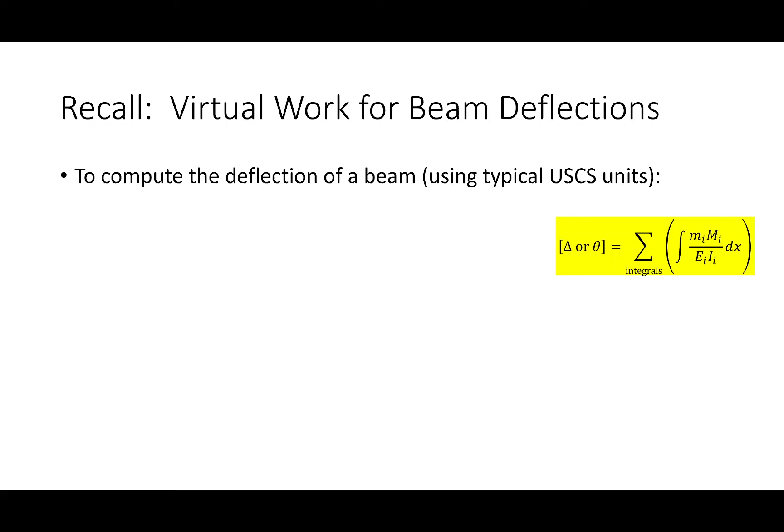Let me pull the slideshow up—this is really important for our discussion. First, when computing deflection, this is where we left off last time: we're going to use the following expression. Again, this is akin to what we were doing for trusses. We were summing up energy terms—with trusses we summed up terms, whereas with beams and frames we're summing up integrals. The reason we could sum terms for trusses is because we can treat the axial forces as constant along the length of the member.

We can't do that for moments in beams and frames, so we have to integrate. We still have to do a real analysis and a virtual analysis. Instead of getting a suite of real and virtual values, we're going to get a suite of real and virtual functions. These big M and little m functions are equations that, if graphed, would be the moment diagram. So that's basically what these big M and little m functions are—they are graphs to plot the moment diagram.

If we're talking about the shear diagram, we would have big V's and little v's, but right now we're just looking at the moment diagram. The big M functions are generated from the real structure. The little m functions are generated from the virtual structure: kick all the loads off the structure, place a single unit load at the point of interest with a magnitude of 1 in the direction of the assumed displacement.

We still have our E values. For I values, we were using areas for trusses—now we'll use I's for moment of inertia. For most practical purposes, it's the same thing since it's just a numerical section property, so we can treat it the same way. We do have to account for our unit conversion factors, so for rotations, this is what we left our class with last time.

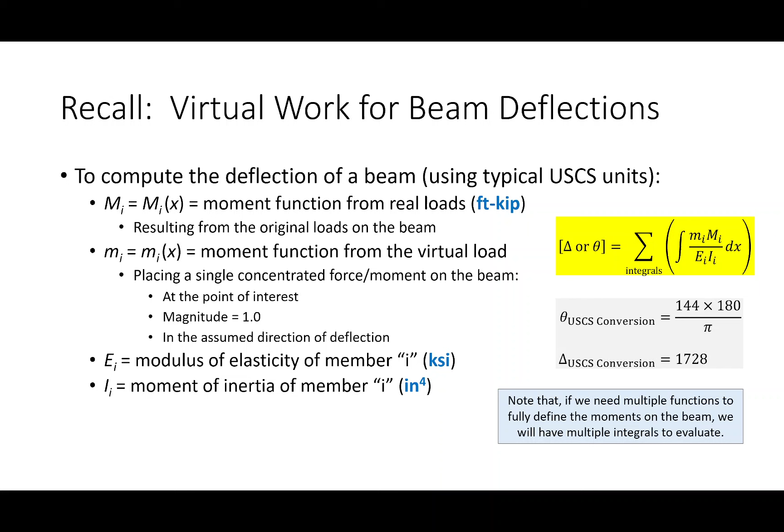What we're going to have to deal with, and what's going to be the central challenge of beam deflections, is this. Let's say, for example, I have this beam. I have to believe everybody here could construct the shear and moment diagram for this beam, computing the reactions and drawing the shear and moment diagrams.

The question I want you to ask is how many moment functions, how many m of x functions, are necessary to fully construct the moment diagram. Not from a math perspective of how many equations, but how many functions of x do we need in order to fully construct the moment diagram?

There's a really easy way of figuring that out: imagine a big section cut moving along the beam. Keep it simple, and whenever you see something different, that necessitates the need for another function.

To give an example, imagine this is my section cut. Remember, when you cut a section, you can look either to the left or to the right. So let's cut a section and look to the left, and start moving this section cut over. If I cut a section and look to the left, what do I see?

I see a triangular load, triangular load, triangular load, triangular load. Now I see something different: a reaction at B and a distributed load. So I keep going, keep going. Is there anything different between here and here? It's still a triangular load, distributed load, reaction. Over here, triangular load, distributed load, reaction.

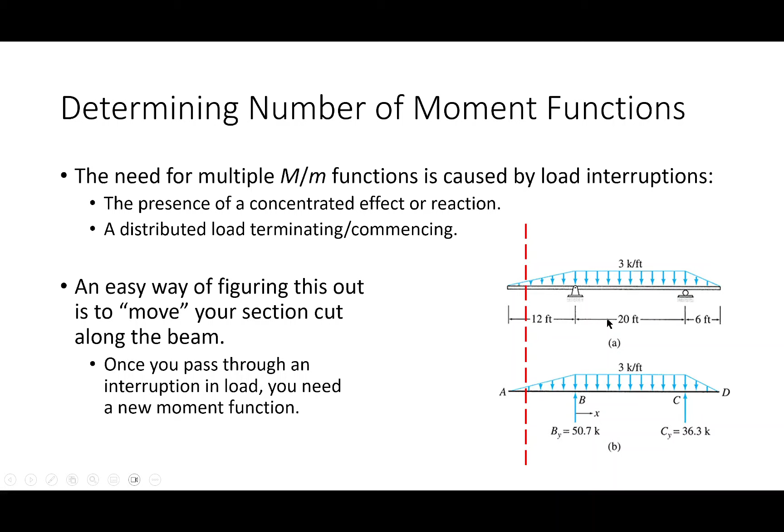Now, I want to look at the virtual loads. Let's take a step back. We're going to be doing at a minimum 2 analyses. We're going to be doing a real analysis, and we're going to be doing a virtual analysis. Right? Okay, let's think about this.

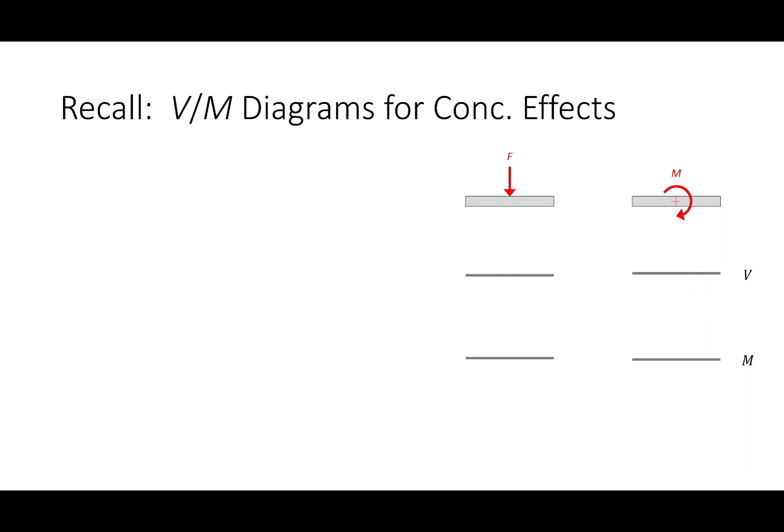The virtual analysis is kicking all the loads off the structure and replacing it with one load. And the one load is either going to be a concentrated force or a concentrated moment, right? So let's take a look at what the shear and moment diagrams look like.

Here's what the shear and moment diagram looks like for a concentrated load. We have constant shear, linear moment, right? And then for a concentrated moment, we have constant shear, constant moment. The moment doesn't affect the shear diagram, and for the moment diagram, it would just be this.

So the real point I want to make is, does anybody see any pattern with these moment diagrams? If I have a structure that has nothing on it but either this or this, does anybody notice something about the moment diagrams? The answer should be, they're all linear. They're all lines, right? Okay, are you with me on that?

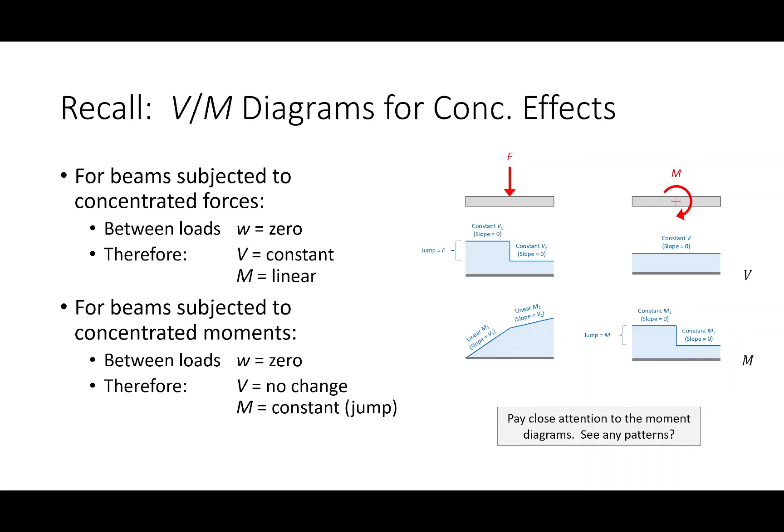So here's what I'm getting at: if we're talking about virtual functions, because the structure is only subjected to one concentrated effect, they're always going to be lines, okay?

And the value there is that you can always find the equation of a line a lot easier maybe than cutting a section. Remember, we can always cut a section to determine a moment, right? Well, we could also just plot the moment diagram and just look at our values. We could cut the section, but that could be tedious. Here's something else that we could use.

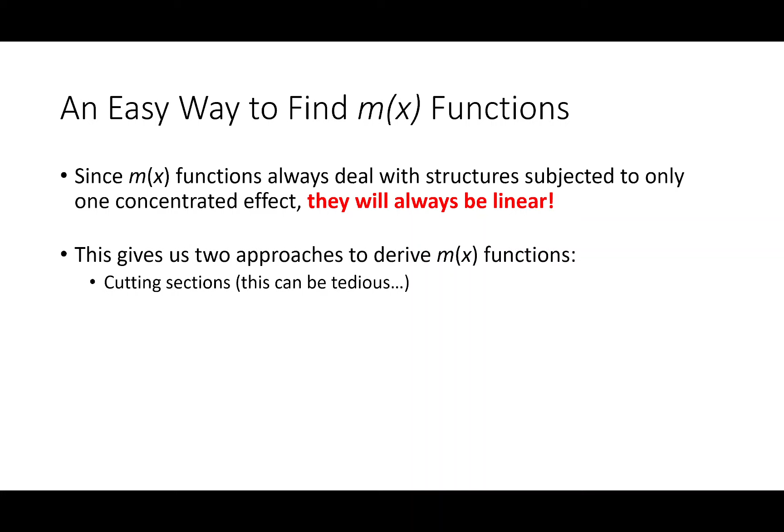That's just basic geometry. For example, how do we find the slope of a line? The change in y over the change in x. But do we even need to worry about finding the slope of a moment diagram? Because isn't the slope of the moment diagram just the shear, right? And then we could say y minus y1 equals m times x minus x1, using point slope formula just to find the equation of a line. Isn't that a lot faster than cutting sections?

So for your virtual functions, it might be a lot faster to find the functions this way than cutting a bunch of sections. I'm throwing this out there because I'm trying to make your life easier and faster when doing these problems. Homework 6.2 is going to be kind of tedious, and I'm throwing this stuff out at you to make your life easier when you do that assignment.

So far, so good? I'll demonstrate what I mean here in a bit. And by the way, I should mention that if you ever have a linear real moment diagram, this would work too, that you could just use point slope formula to figure out your function. Don't worry, I'll show you how that works in some examples.

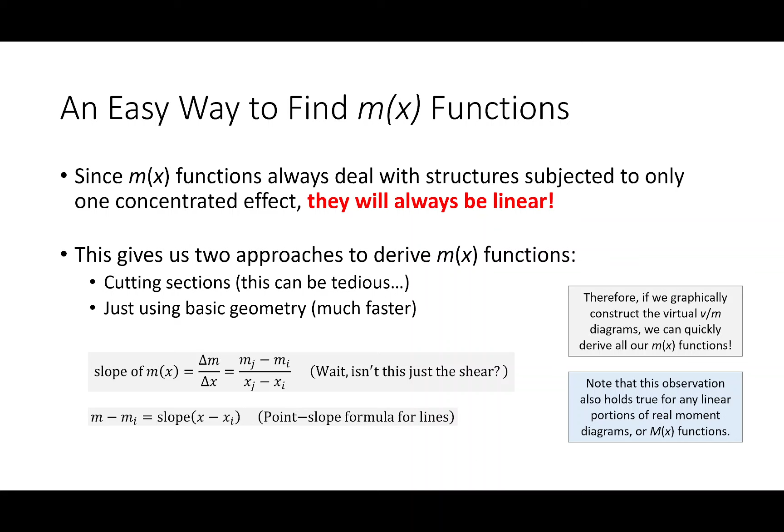Everybody good? Okay, this is going to be our problem for today. Let me go to the notebook here. All right, so, oh, that's the wrong one. We're on example 1.

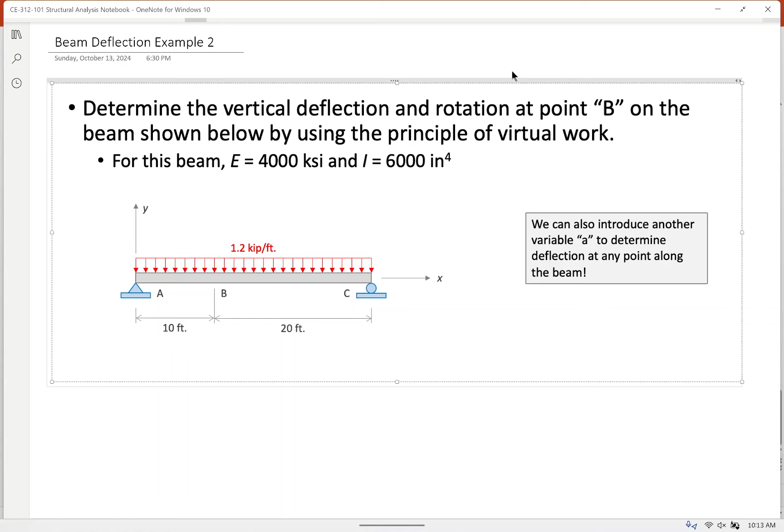Okay, so here's our problem, and I want to find the vertical displacement and the rotation at point A. I want to see what is going on with this point here in terms of displacement and rotation, okay? So the idea, just to put a little picture up here, here's the beam, backwards.

If the beam is subjected to some load, imagine you were holding a flexible ruler in your hand and you just applied some force over it. I propose that the ruler, or the beam in this case, is going to deflect something like that. So not only are we going to get some displacement, but we are also going to get an angle change. So it's not only displacing, but that point is rotating. So we're going to get an angle change, and we're going to get a displacement.

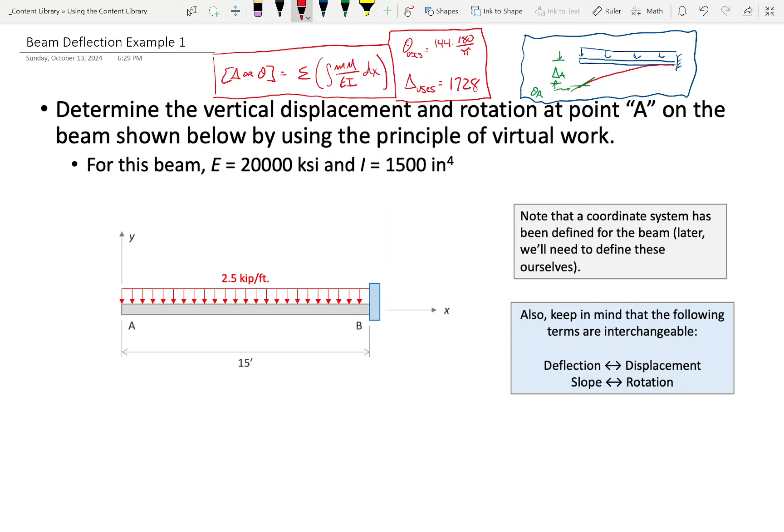Everybody get a general idea of what we're doing here? All right, so the first thing we're going to do is look at the real moment functions. Keep in mind our goal is to look at these integrals.

Let me go back to our section cut example. How many functions are we going to need to fully define the moment diagram for this beam? One, right? What does the moment diagram look like for this beam? We don't need the values to sort of get the idea.

The shear diagram is going to go down, and then there's going to be a reaction that brings it back up. And then the moment diagram is going to do like that, and then there's going to be a reaction that brings it back up. So we're going to have some moment diagram, which is a parabola. We only need one equation to fully define the moment diagram.

So what I'm going to do is this: I'm going to cut a section. And which direction do you think I should look? To the left or to the right? Left, right? There's less going on.

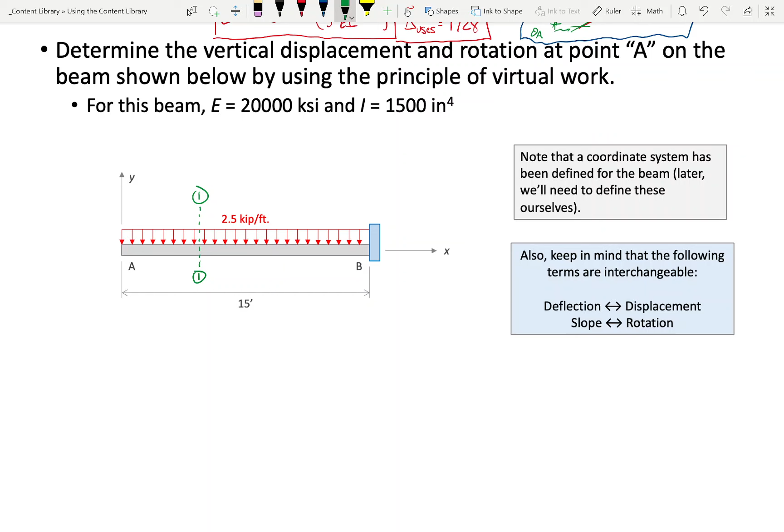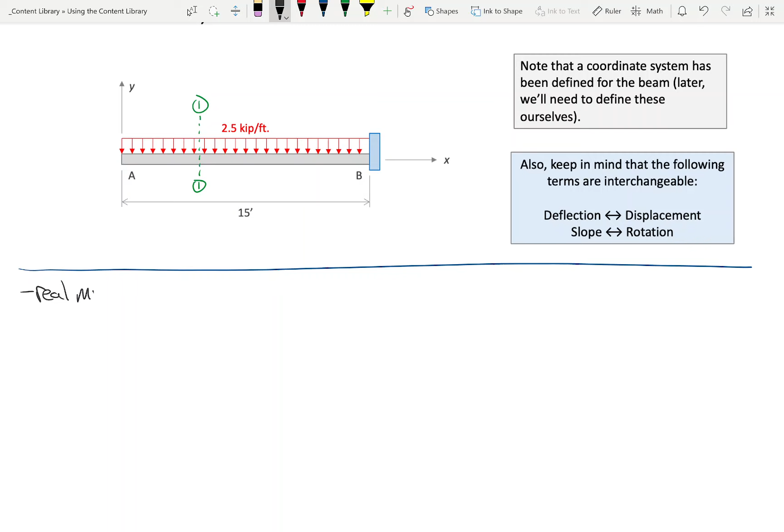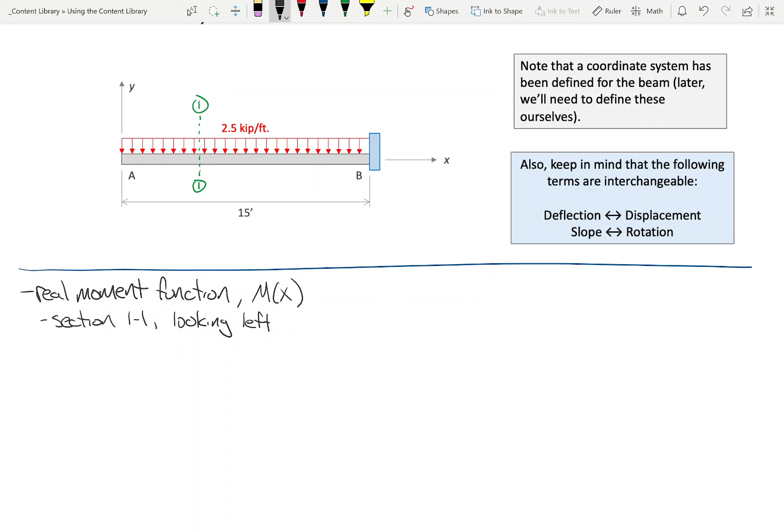So what we're going to do is say, okay, real moment function. I'm going to cut a section and look left. All right, so what does that look like?

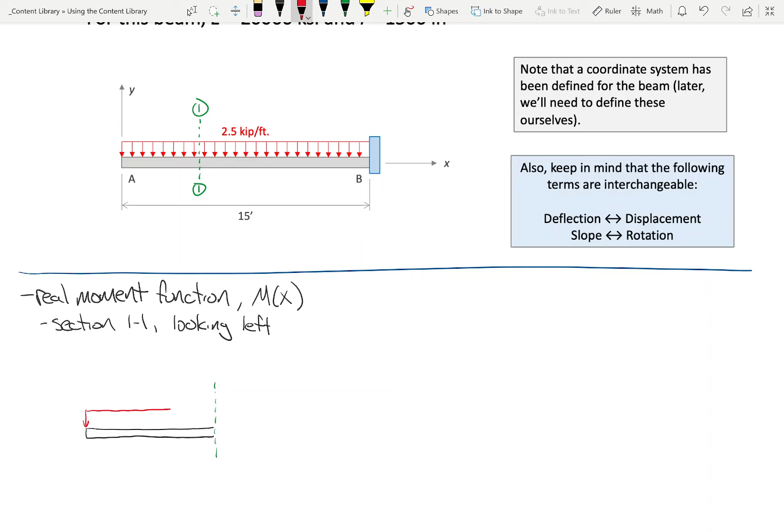So let's see, I've got this beam cut right here. I've got a load right here. This is 2.5 kips per foot. We're cutting a section because we're trying to derive a function, an equation as a function of x. So the distance from the left support is going to be some distance x.

Tell me what to do. How do I collapse this distributed load? What's the point load going to collapse to? That's how far away it is from the section cut. How much is it? 2.5x.

What we're interested in, we have our shear and we have our moment. What we're really interested in this case is the moment. We don't really care about the shear function because we're defining our deflection as this. By the way, near the end of our talk on this, we are going to take a look at what would happen if you consider shear. That's a later discussion, we'll get to that here in a bit.

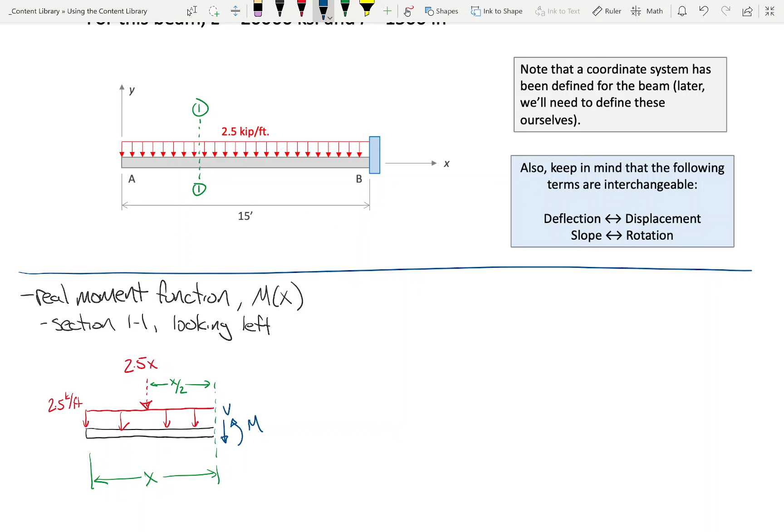All right, so I'm going to cut a section, I'm going to sum moments at the section cut. I already cut the section. Okay, so tell me what to write. How do I account for this? What do I do?

Does it go on left or right? 2.5x times x over 2 is going on the right side. There you go. 2.5x times x over 2.

And then, is there anything else I need to put in this table? M, and that goes on the right.

Okay, so 2.5x times x over 2 is 1.25x squared, right? Okay, let me show you how I'm going to write this. I want to get into this habit. So therefore, what I'm going to say is that m equals minus 1.25x squared, okay?

But what I'm going to do is, the beam is how long? 15 feet long? Yeah. Okay? So what I'm going to do is I'm going to say that this is from 0 to 15, okay?

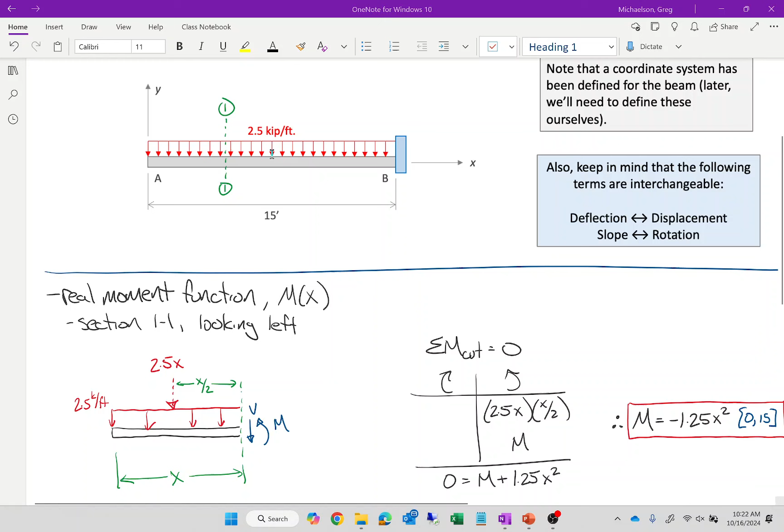All right, so how long is the beam? 15 feet. 1.25? Is that what we said?

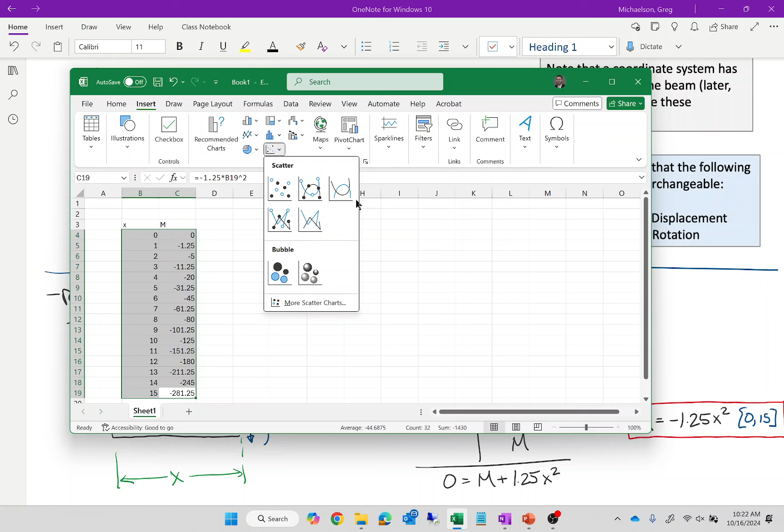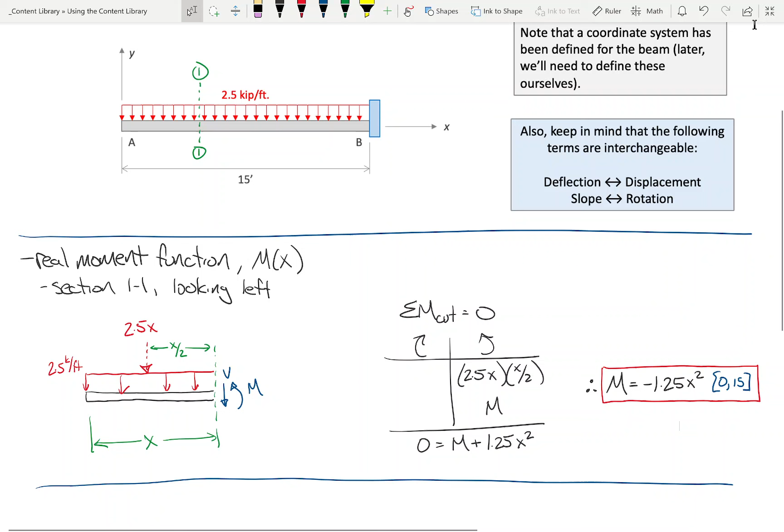Does that look right? That looks right, doesn't it? So we have a simple way of just checking whether or not the function that we've derived makes sense. That is always going to be advantageous, or that's always going to be available to you.

Okay, so let's write this down here. So we have m of x. Sometimes I skip the of x and I just write m, but if you want me to write that, I will. It is negative 1.25x squared, valid from 0 to 15.

Now this valid from 0 to 15 is not really going to matter for this problem, but it will matter for later problems because we'll have multiple functions. So I want to get in the habit of sort of describing that. Okay, so far so good?

Okay, so now let's do a virtual moment function. This problem is asking for two deflections, or two things we have to evaluate. We have to evaluate the displacement at A, we have to evaluate the rotation at A, okay?

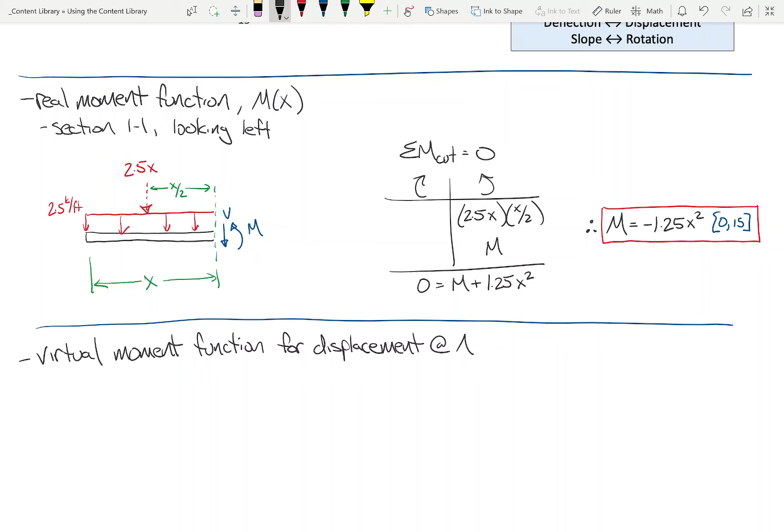So what I'm going to do is I'm going to say virtual moment function for displacement at A. Okay? All right, so let's see how we would do that.

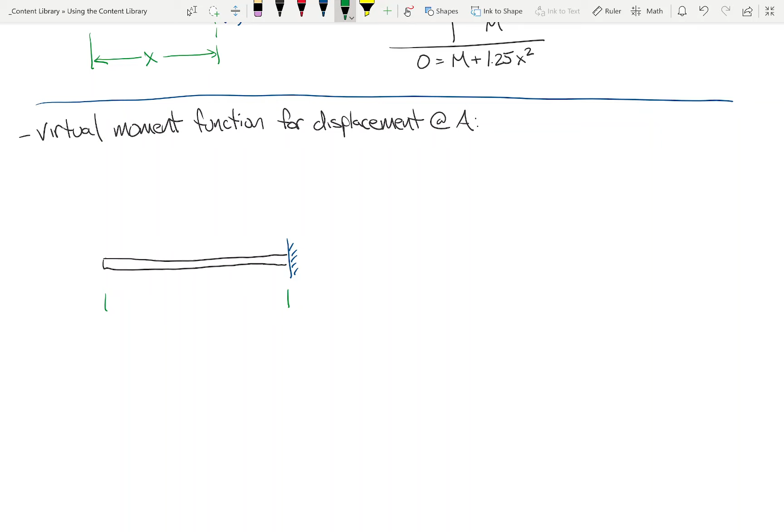Okay, so how did we do virtual analyses for trusses? We take the structure. Okay, let's see, here's the structure. This is the structure, that's point A. We kick all of the original loads off the structure. Get all the loads off the structure. Kick them off. And we replace them with a single unit load at A.

Now, for the original structure, do we all agree that a reasonable assumption would be that point A deflects downward? So here's what I'm going to do. I'm going to place a single unit load right there. Okay?

With me so far? Now, let's just sort of conceptualize this. What do we think the shear diagram and the moment diagrams look like? Let's do V and M. So we're going to have down, over, up, right? So the shear diagram is going to be down, over, up, like that's what it's going to look like.

So what's the moment diagram going to look like? It's going to go down, up, right? Everybody good on that? Okay, so we'll see if that's right.

Okay, so what I'm going to do, cut a section, look left. I'm going to look the same way I looked before. So we'll say little v, little m, at x.

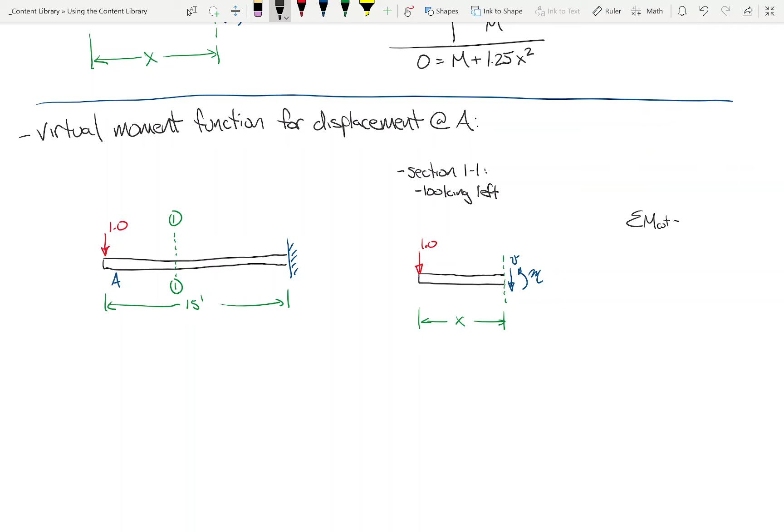Okay, tell me what to write. How do we handle this? What's the moment at the cut from that? 1 times x. 1 times x, which side, left or right? Right, right, so we have 1 times x.

And a lot of times I will write my 1 as 1.0 just so it's sort of like not mistaken as L or I or something like that. So that's just me trying to make sure that you all can read my handwriting.

Then we have the m, right? And the m goes like that, right? So 0 equals m plus x, right? Everybody with me on that?

So would you agree that m is going to equal minus x? And that's also going to be valid from 0 to 15, right? So,

Okay, what I might do for the purposes of notation is I might call that m delta because I'm going to have another little m function for rotation. So that's just me sort of differentiating what I'm about to show you here in a second.

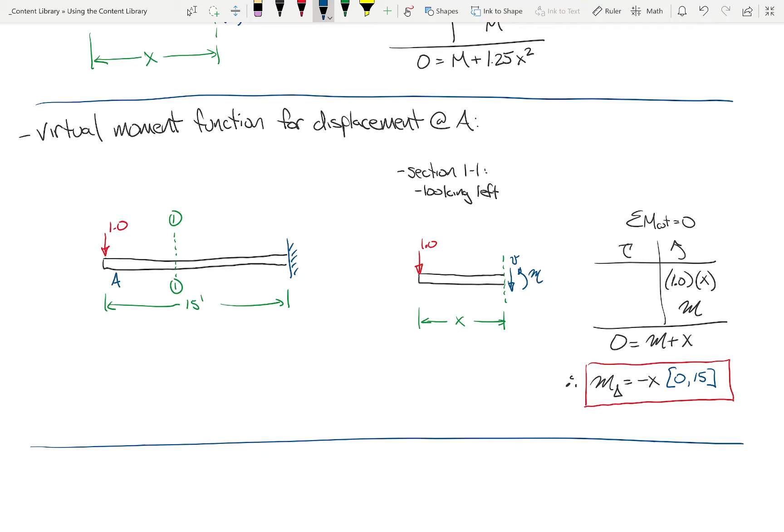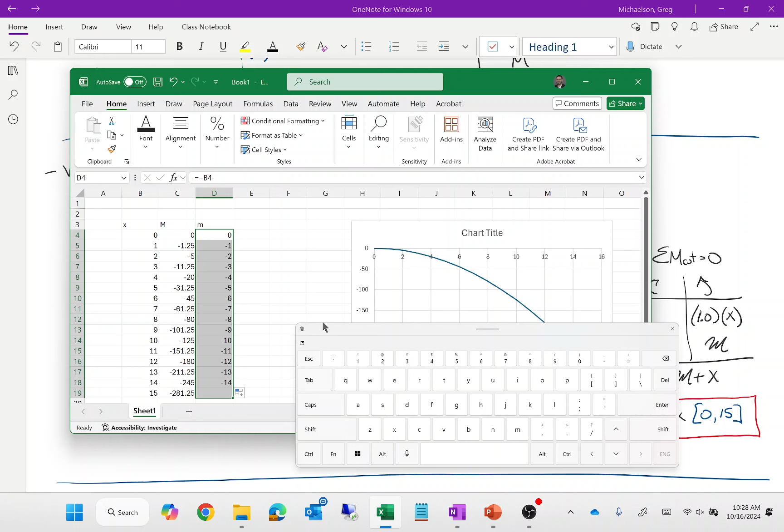Okay, and again, can we validate this? Well, absolutely. You know, just go here and say do that, and then does that look right? Looks right to me. So that one's a pretty simple one to just sort of know that it looks right.

But later on, some of these functions may not look so simple, and so being able to graph them is pretty important. Okay, so we'll write little m, and I'll just put m delta is minus x. Also valid from 0 to 15.

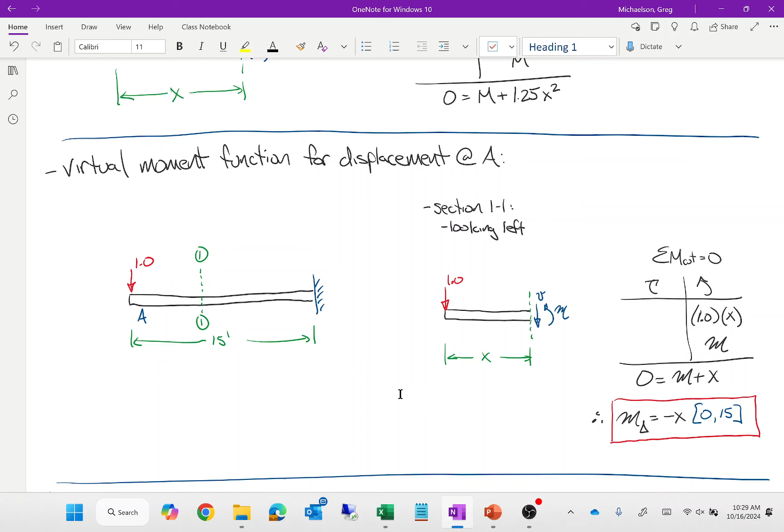So far, so good? So now let's do the method of virtual work, okay? We'll evaluate this deflection, then we'll come back and do rotation.

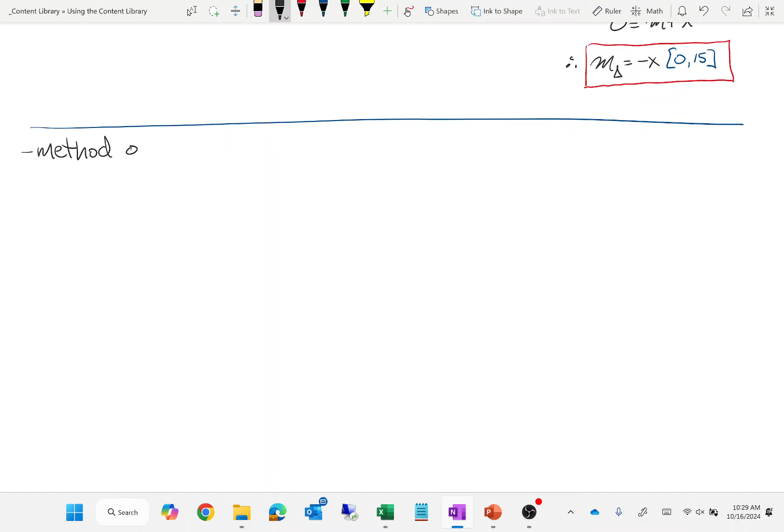So what we're doing here is we're saying that the deflection is the sum of the little m over EI dx integrals. That's what we're doing.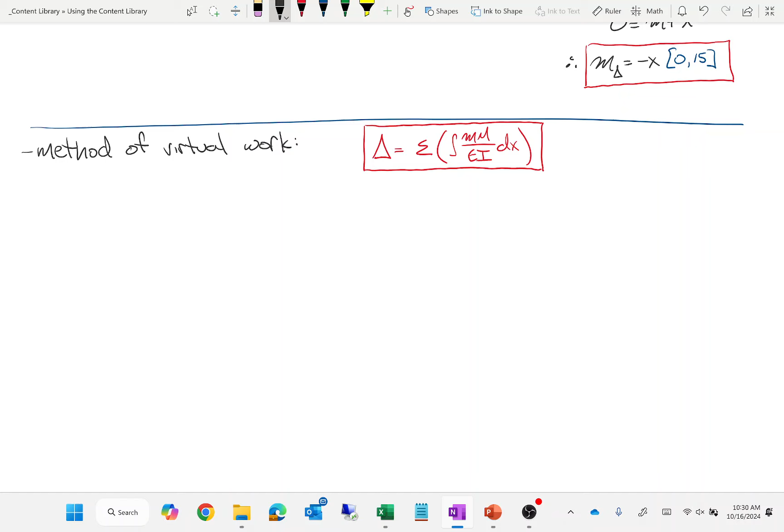But we only have one integral to evaluate. Again, this problem, we're only going to have single moment functions. This homework, only single moment functions, but later on we might have multiple ones. All right, so let's sort of write down all these terms.

So we have an m of minus x and m of minus 1.25 x squared. By the way, if we want to throw some units on this, so this would be foot kips, okay? And for those of you wanting to be hyper specific about your units, the units for this is actually feet, because you're taking a moment, which is a force times a distance. The force is unitless, so it's a unitless force times a distance. That's why it's feet.

Okay, E. What was E in the beginning of the problem? What was it given as? 20,000, and that was in KSI. And we were given a moment of inertia of 1,500. And if you recall, moments of inertia are in inches to the fourth, so it's like an area times a distance squared. That's why it's inches to the fourth.

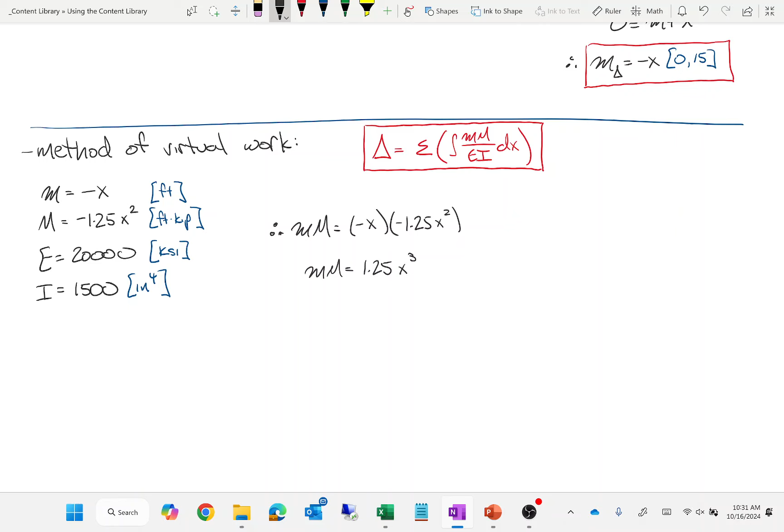Okay, so what I'm going to do is a little bit of algebra off to the side. So the first thing I'll do is little m times big M. So that's going to be minus x times minus 1.25 x squared, and so little m big M is 1.25 x to the third, right? And maybe what we'll do is also formalize that and say that that is valid from 0 to 15.

Okay, so therefore the integral is actually pretty easy. So if I want to find the deflection at A, remember, the deflection is just summing up all of that internal energy. So what I'm going to do is, this is how I'm going to do this. I'm going to integrate from our little m big M over EI.

Or here, let me get formal. Let's move that over here and say we're summing these up. So here's how I'm going to do this. We're going to integrate from x equals 0 to x equals 15, of the following.

So what is little m big M? Little m big M is 1.25 x to the third, right? And then EI, E is 20,000, 1,500, dx, okay?

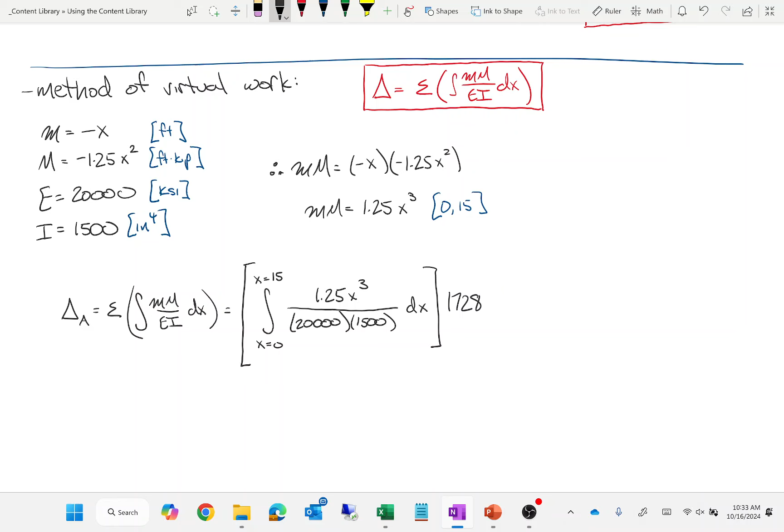Now, did I forget something? For the astute observers, the unit conversion. What I will do is take this entire integral and multiply it by 1728. The reason we're multiplying it by 1728 is because KSI in inches to the fourth for our denominator terms, but our numerator terms are in feet. And so we've got to resolve that. We end up having 3 feet terms that need to get converted to inches.

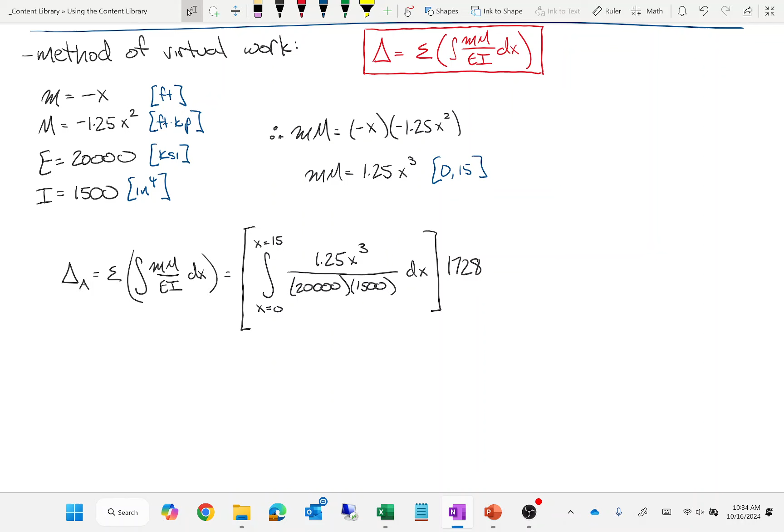Now here's the thing about this integral. I know it's 10 o'clock in the morning and you're thinking calculus, it's too early. But I really want you to take a look at this integral because it's really not hard. First off, I seem to remember this rule in calculus that says that I can factor out constants.

Right? And then what am I left with? An integral from 0 to 15 of that. I mean, isn't that pretty easy?

Now, here's the thing. Let's talk about this. I want to be clear that this is not a calculus class, okay? So you all need to be able to perform integrals, but when I say the integrals are simple, I mean it, okay? This is about the most challenging integral that we will do in here. It's integrals of polynomials, okay? So first off, I'm just going to tell you that the answer to this integral is

12,656.25. Okay? Now, just to be clear, if we want, we could say that the integral from 0 to 15 of x to the third dx is x to the fourth over 4, evaluated from 0 to 15. So factor out the 1/4, 15 to the 4 minus 0 to the 4, which is 15 to the fourth over 4. Okay, and plug and chug, that's what you're going to get.

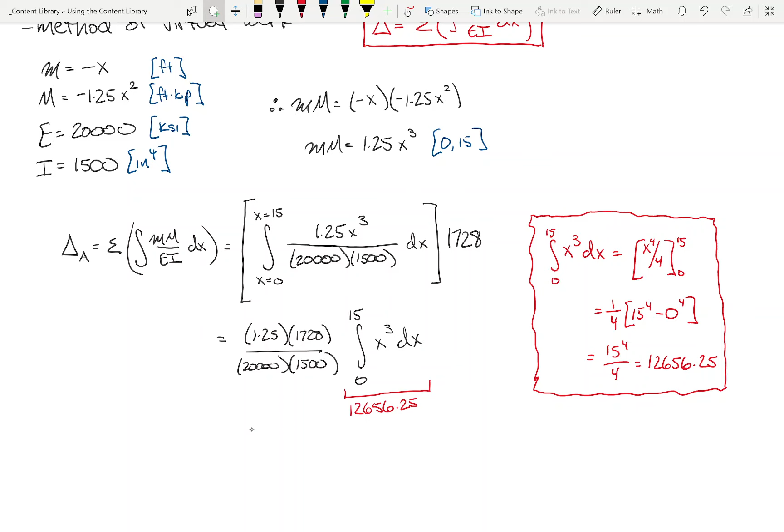Sound good? So the deflection would then be 1.25, 1728, 12,656.25 over 20,000 times 1,500. And when you evaluate that, what do you get?

And typically, I tend to ask that deflections get reported to 3 decimal places. That's sort of a standard in most software packages. Like most software packages will do 2 to 3 decimal places, no more. 0.911. Now, so it's 0.911, but positive 0.911. Okay. Do I have a second on that?

So what does that mean? I propose that the deflection at A is 0.911. What are the units for that displacement? Inches. Like when we developed our conversion factor, we developed it to achieve a target unit system of inches. And that's the magnitude. The direction is downward because we got a positive answer because that was our assumption. Okay?

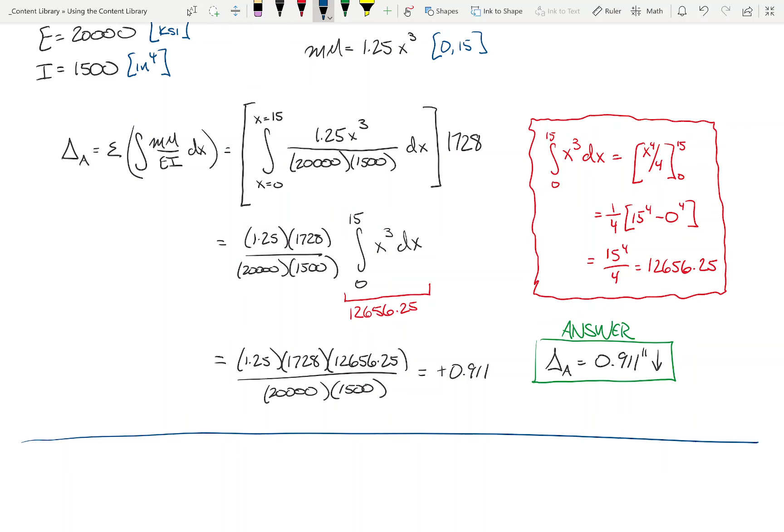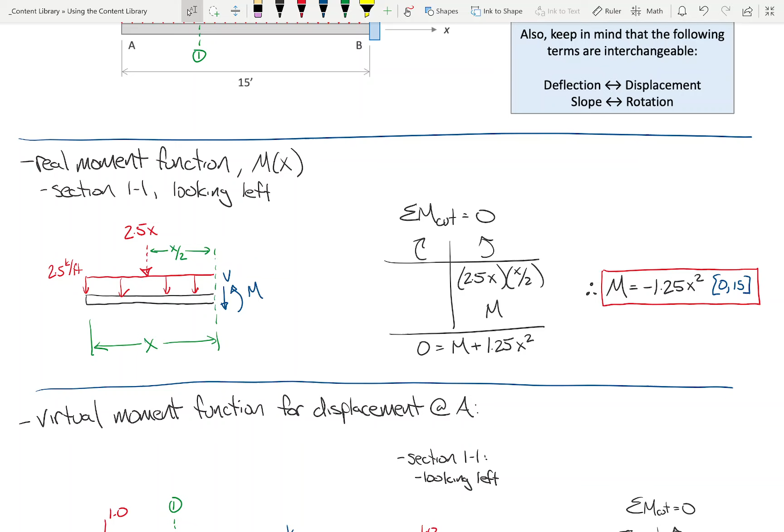So, the next thing to do, if we want to close this out, is the problem asked us to compute both the displacement and the rotation. Okay? So let's talk about how we would do rotation. If we sort of scroll through the problem, we said, okay, we have a real moment function, and then we had a virtual moment function for a displacement at A. Really now what we're going to need is we're going to need a virtual moment function for the rotation at A. Okay, we're going to need that. So we're going to do another virtual analysis.

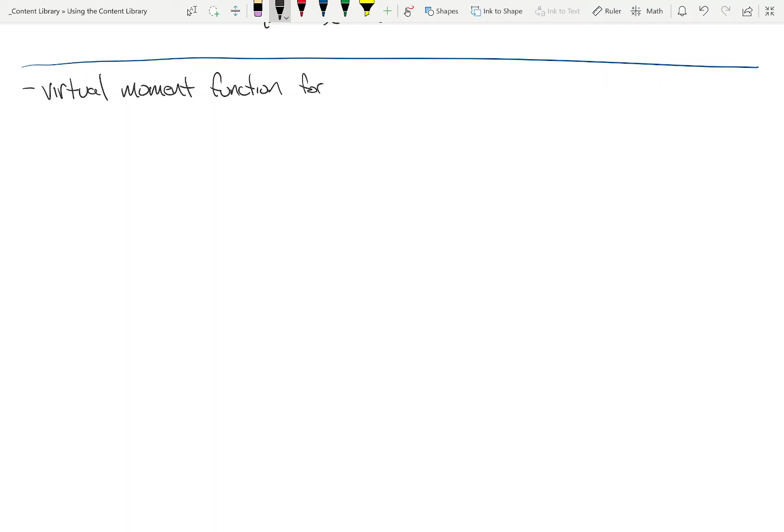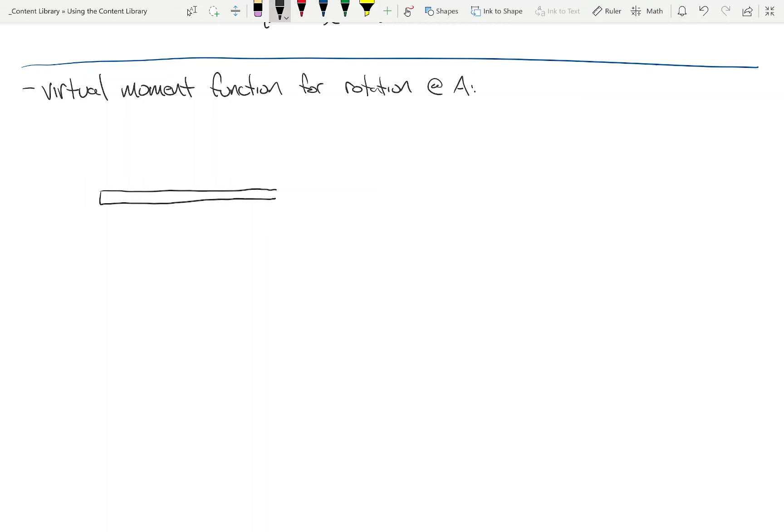Okay. So let's see if we can develop a virtual structure in that regard. So here's our beam. This is point A. And remind me, let's see.

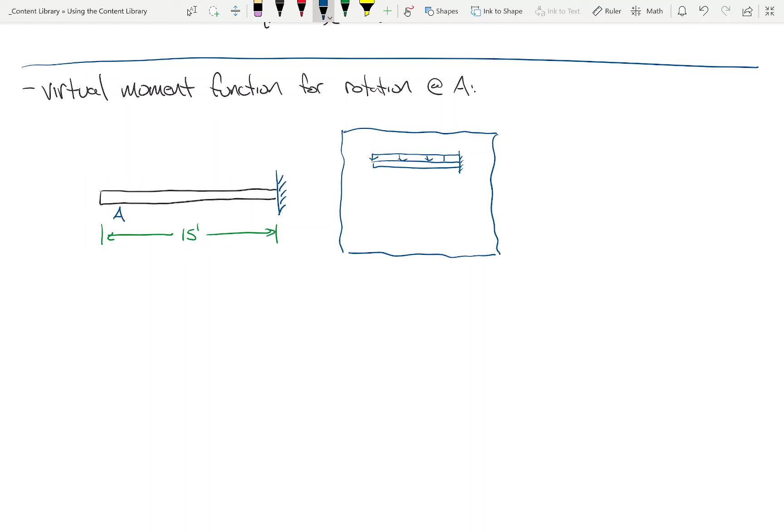We said that the beam is going to deflect, I don't know, something like that. So what you're telling me is that it used to look like this, and now it looks like that if we're looking right there. So the rotation goes like that. So maybe what I ought to do, place a unit moment like that. And by the way, if you're getting worked up over whether or not it needs to rotate this way or this way, it doesn't matter, just guess one, okay? And if you get a negative answer, it's just going the other way. That's all that means. Make sense?

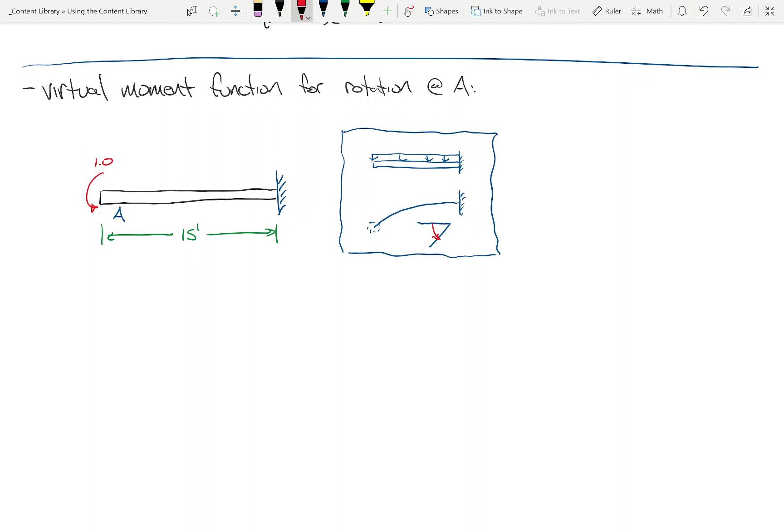Okay. So, same thing as before, right?

What I will say ends up becoming an issue, not for this problem but later, is ensuring that the moment functions all respect the same coordinate system. So for now, if you look left for a real moment function, it's probably a good idea to look left for a virtual moment function too. Look the same way. You don't have to, and you'll get the same answer, but the algebra tends to get pretty messy. You'll see what I mean.

So there's our function, or there's our section cut, right? Just looking at this part over here. So if I sum moments at the cut...

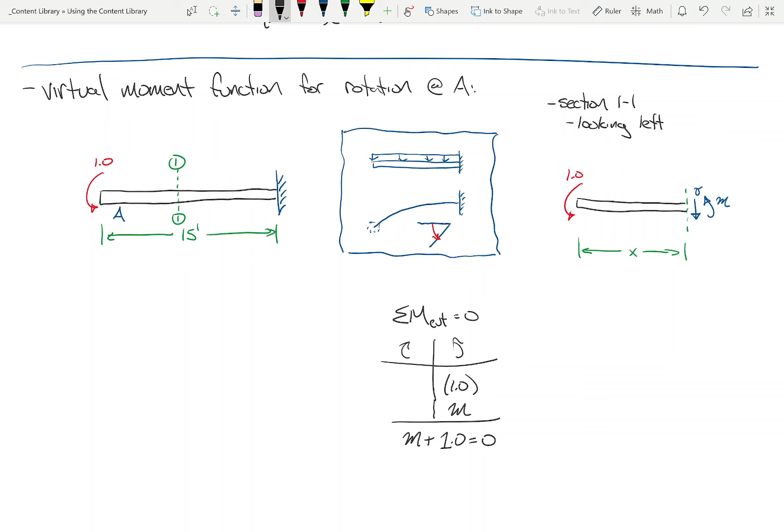So therefore, our m theta is going to be -1, valid from 0 to 15. Typically, if you have this and this, usually you're going down in order, right? So this is an x term, this is a constant term, typically. Not always, but typically.

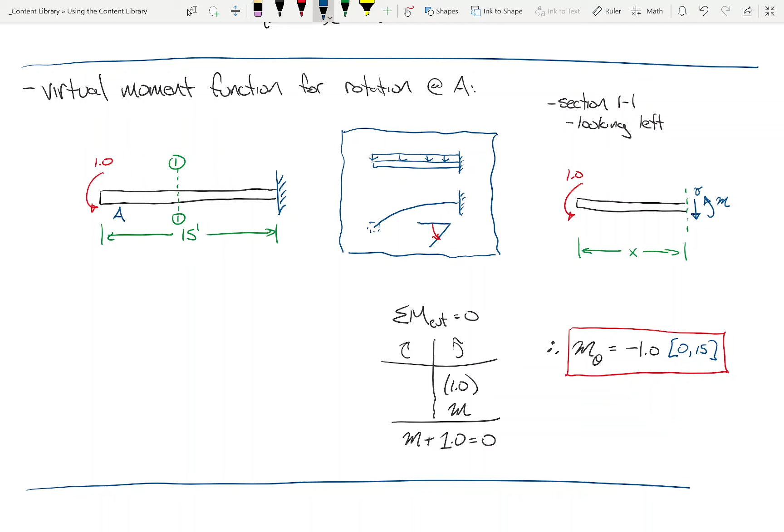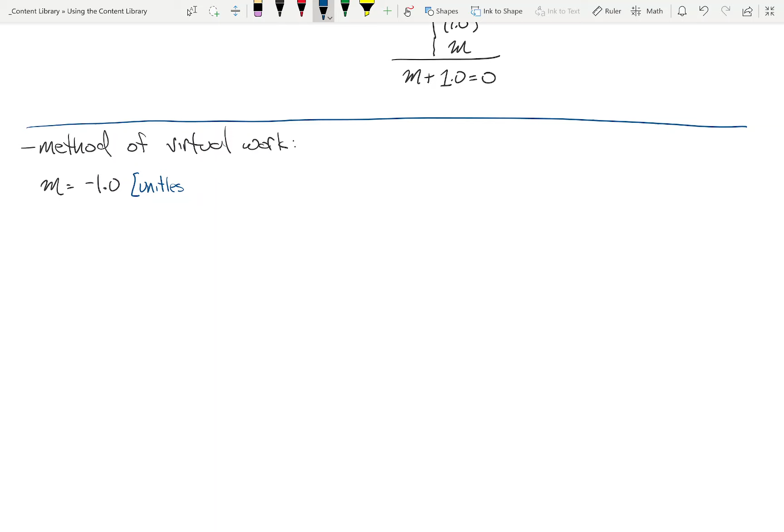Everybody good? So the method of virtual work then is pretty easy, right? So this is -1, and the units for this are actually unitless. We still have our same real moment function, that doesn't change. We have our E value, 29,000, not 29. Here, I'll do the same notation.

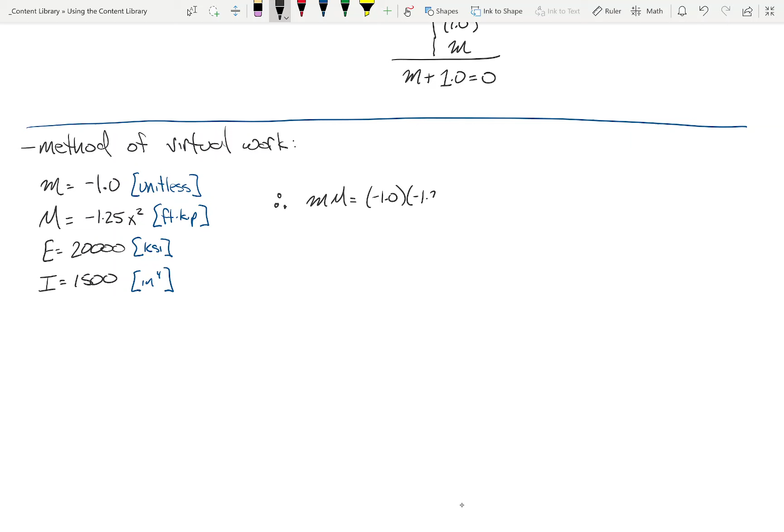So a couple things that we can do, just like last time. Let's do this algebra first. We'll do 1.25x - why did I say x cubed, it's x squared. I think I'm getting ahead of myself. Okay, so now we can compute our rotation, right? We're still going to use the same idea, we're still going to sum integrals.

But we're only going to have one integral, okay? And it's going to be an integral from x equals 0 to x equals 15 of a big old fraction. The EI on the bottom. On the top, we have that. And then what's our unit conversion going to be here? Times 144, 180 over pi.

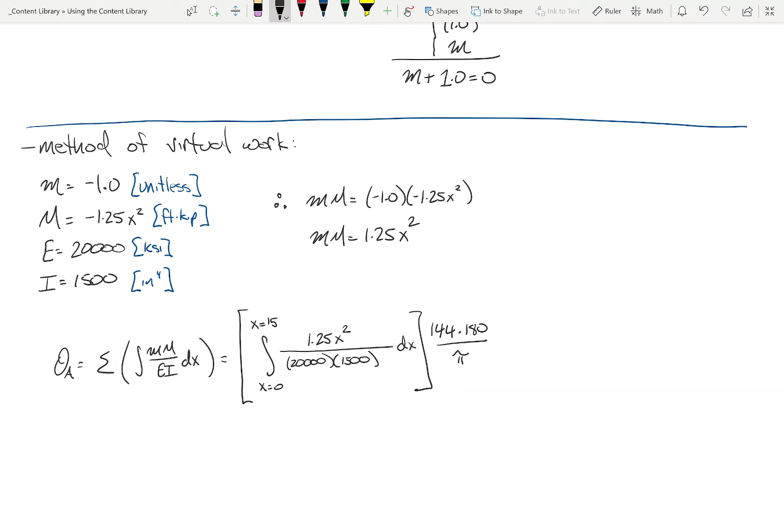And again, this is pretty easy, right? Because everything that's a constant just gets factored out. So if I factor everything out that's a constant, I'll stick that all over here on the left. So I've got one big old fraction: 1.25, 144, 180, 20,000, 1,500, and pi. And what am I left with? I'm left with an integral from 0 to 15 of x squared dx. That's pretty easy, isn't it? So are you okay if I just tell you the answer to that is 1125?

And what do we get here? We'll say also maybe 3 decimal places. Positive, by the way.

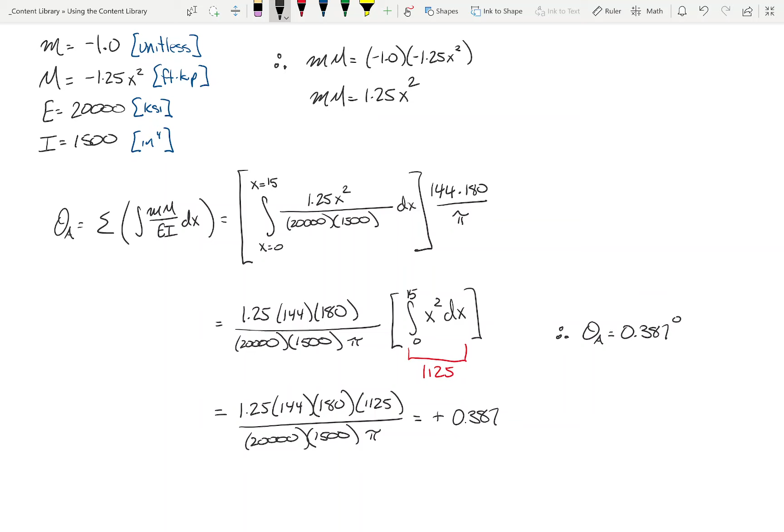Anybody got an answer? 0.387? Yes, okay. So therefore, the rotation at A equals, let's say, 0.387. What are the units for that 0.387? Degrees. And in which direction? Well, which direction was our concentrated moment? What is that, counterclockwise? Counterclockwise.

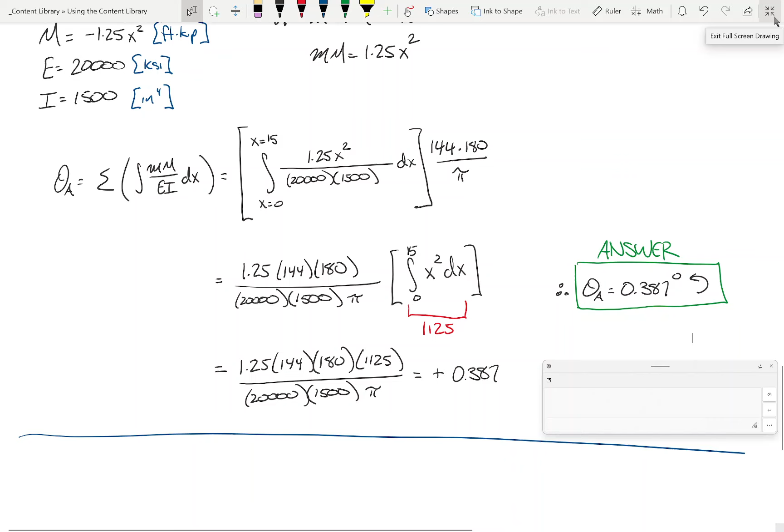Not too bad, right? So I will let you know that for your assignment due Friday, I made it a little on the challenging side. I should go ahead and let you know. So here's what I did. For your homework assignment, I made it a triangular load. And what I am asking you to do for this problem is work a little backwards - I'm asking you, what does the I value need to be, what does the moment of inertia need to be such that the deflection is a certain value? Which is very much a design problem, right? Pick a beam such that it won't deflect too much, okay?

The cutting of a section - keep in mind we've cut sections with triangular loads before, so refer to a lot of that we've done before, but yeah. That's all I got, everybody. I'll pull the code up one more time.